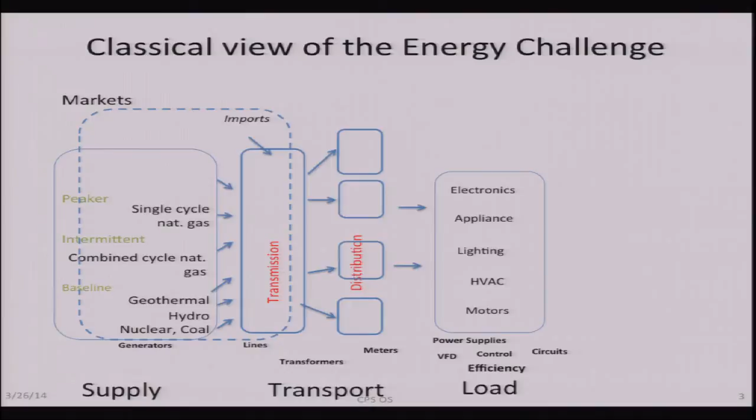So one way of teeing this up: as we think about the energy challenge, we've generally formulated it as 3 tiers: energy supply, transport—which is transmission and distribution to the load—and the problem of managing a portfolio of supply assets to meet a time-varying load. Sometimes as we get into information, we start talking about markets as the extent of it. If we look at what's happened, that piece is really the physical plane of a cyber-physical system.

The physical plane has changed as we've brought in fluctuating renewables like wind and solar, and increasingly storage—historically pumped hydro, but increasingly others. But that's not just on the supply side; we have fluctuating renewables and storage showing up on the load side too.

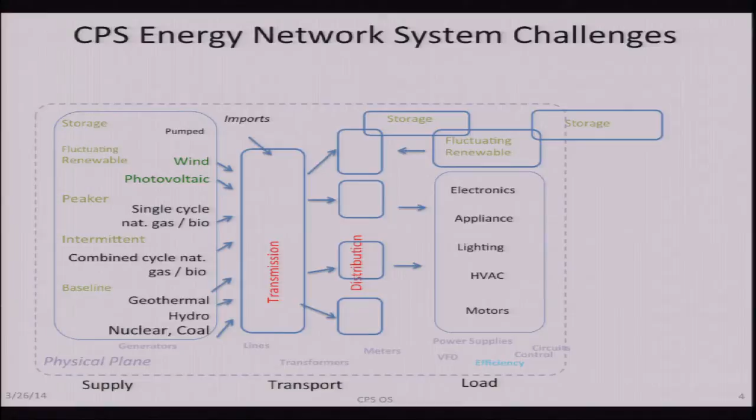And what's really broken about this is that the end purpose isn't to turn the motor on in the HVAC system—it's what you're delivering to people on the far end. So in some sense, that 4th tier of consumption, usage, and pricing is always left out of the diagram.

Today, within the grid, the feedback is subtle changes in the actual signal—voltage, frequency, and phase of electricity. Inside HVAC systems, the feedback is pushback on the temperature of air and water in the media that's exchanged. Whereas going forward, all the feedback is going to come through that information plane that is yet to be created.

So the challenge for all of us is creating the information plane for the future grid. That's the question I'm looking at primarily from the consumption side. As soon as you look at that, the answer is to pay a lot of attention to buildings—why? Because that's where you're spending 70% of your electricity. So let's start with the role there.

In that context, part of what helps us in many fields is to identify model problems—examples of the larger problem. For us there have been a few of these.

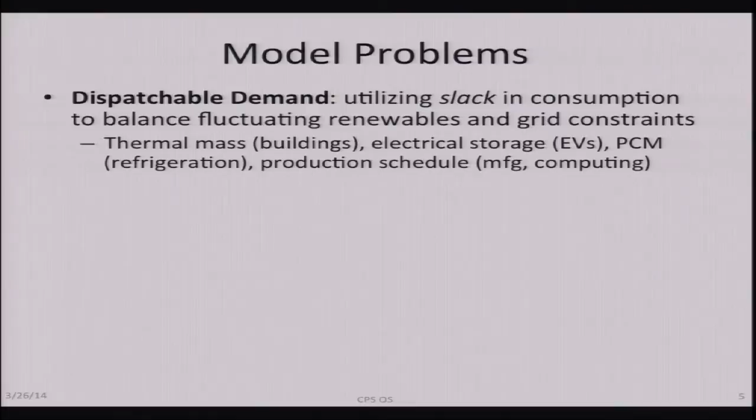The first one is this notion of dispatchable demand: how can we utilize the slack in the energy consumption chain—the demand—to balance fluctuating renewables? We touch on this with demand response and similar concepts. It means taking advantage of thermal mass in buildings, electrical storage like electric vehicles, and phase change materials in refrigeration.

The real gain comes when you can get a hold of not doing something you would have done and shifting that in time. That's where you get this infinite gain on the amount of effort compared to the effect.

So there are lots of different tools we could use to get the actual consumption side to exhibit a load that was more available. Of course, optimizing buildings in this case. We do that for energy efficiency, but just as well, perhaps more importantly, for comfort or for agility when you look at the first one. And that gets into integrated control, model predictive control, personalized conditioning, things like that.

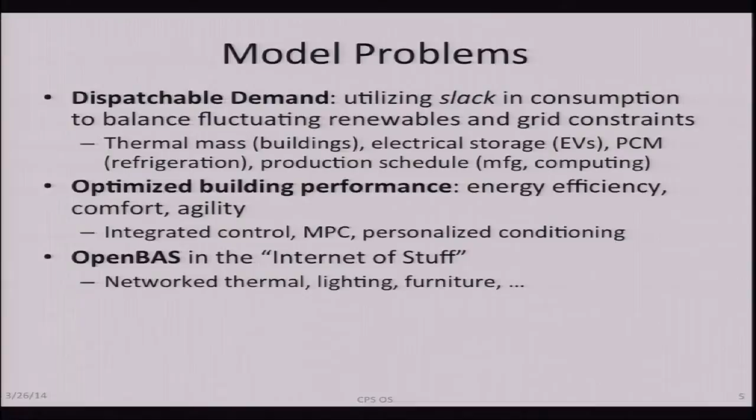2014 is the year of the Internet of Things. In 1999 here at Berkeley, we said 15 years from now we will have the technology to connect all of the people on the planet, and we will be in the act of connecting all the things. Here we are 15 years later, and that's precisely where we are. 30% of the world's population on the Internet, 92% of the world's population on a cell phone, and the next 10 billion devices without any question.

So part of that is moving towards what does that mean beyond the hype? And what you see out of the Consumer Electronics shows is really about open systems for building automation and other things like that.

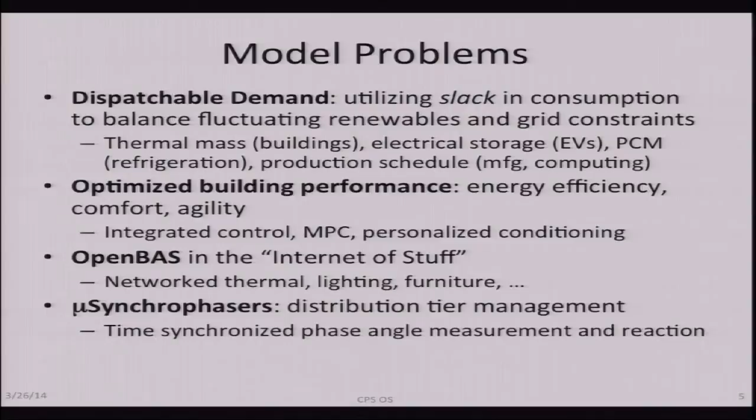Another one that's come directly out of i4Energy is going back in and starting to put information in the grid itself, in particular microsynchrophasers. This is: if you had time-synchronized phase angle measurements, can you actually get situational awareness across the grid and begin to react? And microsynchrophasers are pushing those from transmission to the distribution tier.

So I'm going to use these as a bit of background and walk through what it's taken to begin to solve the nuts and bolts question of creating an operating system for these kinds of things. Without question, the biggest first step was to get to the equivalent of what we did with the Internet and the web. What the Internet did was allow us to deal with all sorts of different kinds of technologies, serving a variety of applications through a narrow waist.

The web did that same kind of focus for the world's documents. And the question here has been: there's a tremendous variety of physical information—electrical, water, environment. Can we create a narrow waist so that you can deliver that information in a homogeneous way to a wide variety of applications? That was some work Steve Dawson-Haggerty talked about here 2 years ago, essentially creating a RESTful stack to deliver that in modern web services.

I'd say this piece with the simple monitor actuation profile has largely been done. There are other variants now, other work as well in this space, but without question, this is a part that's essential to get it going.

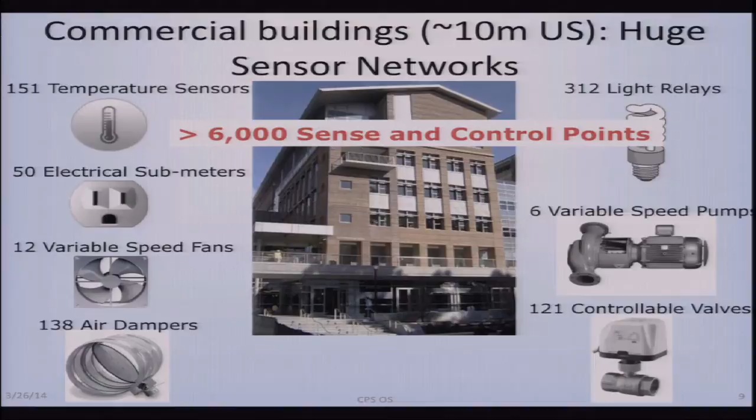Okay so far? Just to ground that, for example, in this building, how much did we sweep up? There's about 6,000 sensing control points that were just built in as part of the building. We didn't have to deploy any new ones. We added a few hundred others.

Is this a unique situation? Not particularly. Most large buildings—there's about 10 million commercial buildings in this country—and the biggest of them almost all have digital controls. Even something as old as the Bancroft Library looks not particularly different.

So there's lots of interesting sensors already throughout buildings. Wireless sensor networks and all the rest of the internet of all of that stuff is easy to deploy. There's all sorts of other sensors that you drop in throughout the space. There's far more, and of course we're all running around with a bunch of additional sensors and actuators in that space. And then there's the really important sensors, right? That what you hear, what you feel, what you see, what you smell are hugely important ones.

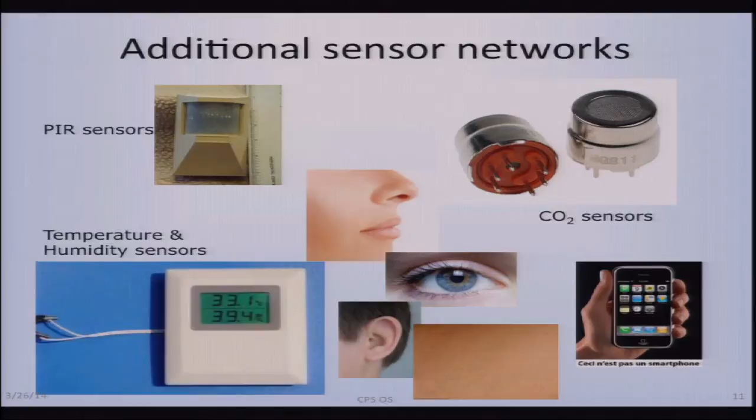That's kind of the bottom piece of this thing that we worked on for quite some time, and I'll give you a little bit of stats on that. The question then is sort of what do you do with that? So what I'd like to do is spend a little time trying to flesh out what would be in this service tier. There's very little question about how you elevate this up to where you could start to build services on top of it. What goes in there?

So, for example, here we are in the peak of summer. The blue shows what we would have expected to have spent on energy to maintain the environment. The red shows what we did. We did a little extra effort early in order to save a lot at the peak.

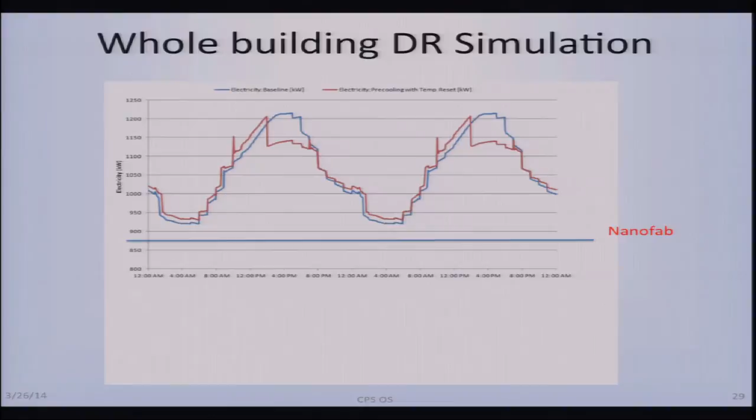A different example: the year of wireless sensor networks. We deployed zillions of CO2 sensors. That's a don't-care anymore—wireless sensor networks are cheap by the dozen. You can bring in calendar data; it's not hard to do that. What's hard is actually integrating it into the building system and making use of that information.

So here's a little exercise. These days, Title 24 says buildings should operate on demand-controlled ventilation. Rather than blowing enough air to provide clean, fresh air regardless of occupancy, you should have a CO2 sensor and bring in more ventilation if you need it, less if you don't. So what's the aftermarket for buildings? Okay, easy to deploy the sensors—what do you do with it?

In this particular example, which Jay Taneja presented: for starters, all decent resources like a room have an entry in the calendar, so you should sweep that up. We can measure the CO2 and blow air proportional to the amount of CO2. So, for example, before the meeting, freshen the room up, bring in nice clean air, and during the meeting, modulate it so you bring in more when you need it. And of course not everything's scheduled, so react to that.

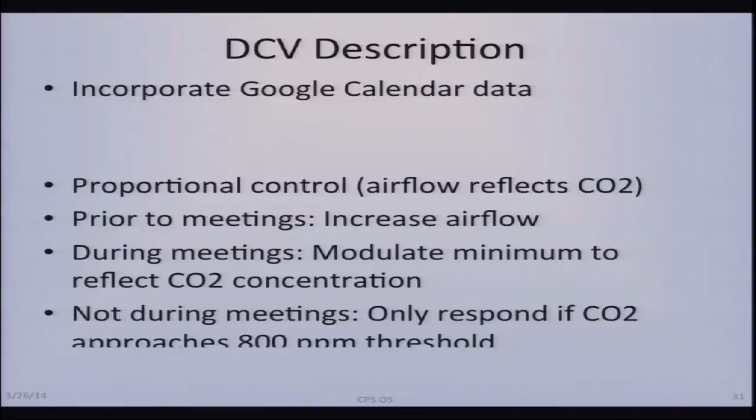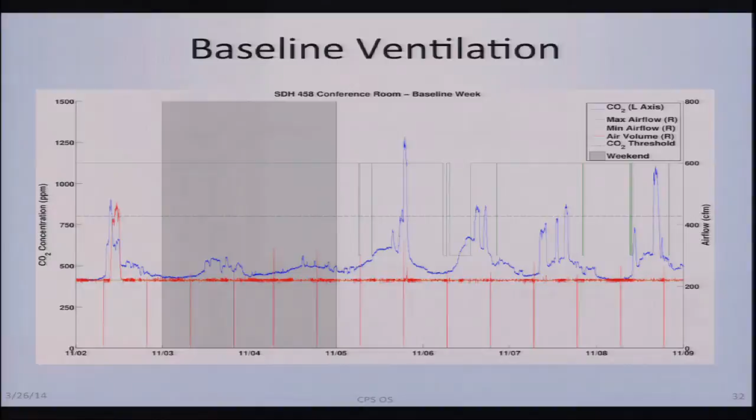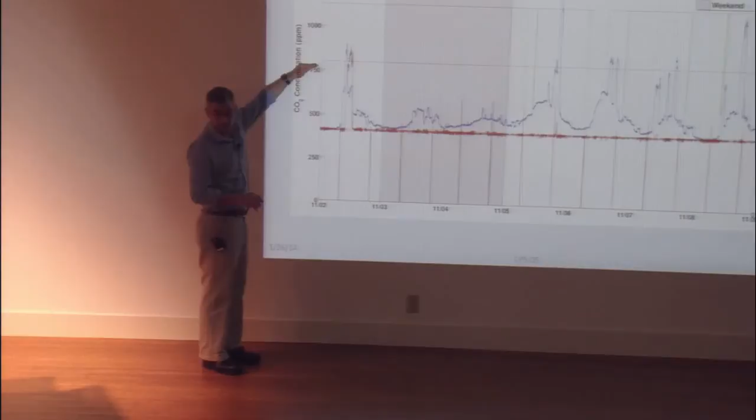All right, how does that perform? Here's a typical seminar room in this building, blowing 220 cubic feet per minute continuously, even when nobody's there. Here's the CO2—notice it's still taking excursions outside of the 800 parts per million. In fact, I think most rooms, especially classrooms on campus, especially in the afternoon, way exceed this—if you're wondering why you fall asleep in lecture. Sometimes exceeded by a lot, okay?

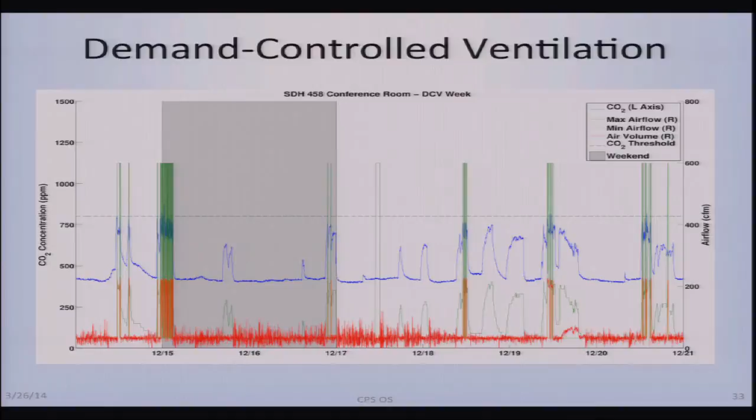As opposed to that, same hardware, just a little more intelligence: now you're typically blowing 30 cubic feet a minute. You blow a lot more when you need it, you blow it in advance, and you almost never go out of range. Result here: saving 85% of fan power for a considerably better environment. So you don't actually have to make this false trade between energy efficiency and performance.

Let's flesh out a little bit more of what's above there. One of the notions, as you start to get into this, is that all of a sudden the idea of applications for the building is a reasonable thing—in fact, many competing applications is a reasonable thing. Those applications use common resources and need to take action across multiple resources.

So in the computer systems world, databases have a notion of a transaction—something where I want to make multiple changes to the state of things, and I want the behavior to be all or nothing. So a piece of work is to try to understand what would be a transaction manager for buildings. I won't go into a lot of detail other than to suggest there is one, and that in buildings it's rather different than in a computer system.

For example, a database transaction: you go to your ATM machine, start to withdraw something, something crashes—you don't get your money. You want to make sure either you get your money and the debit to your account, you get both of those, or neither of those, not just one, right? The bank has a preference on which one; you have a different preference. They're both bad, okay? So the notion here is you'd like some of that.

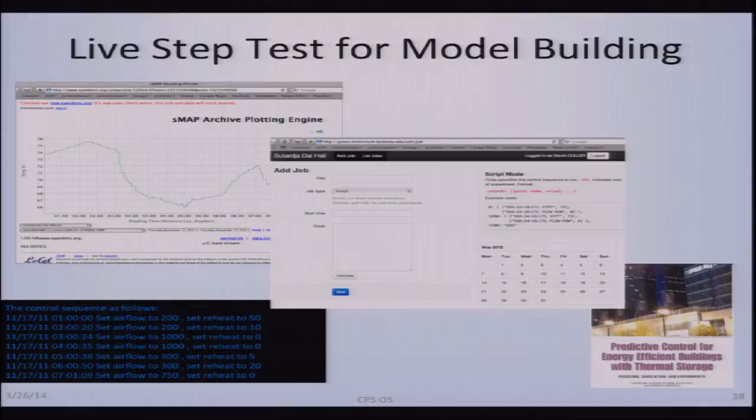So in particular, Francesco Borrelli's team wanted to do step tests throughout this building: here, go move the temperature like this. So we built a tool where they could script the building, and we set rules for when they got to script the building, which was a nice example to develop under what conditions can you do what. So this is part of the things you do as an application, within an envelope that controls it.

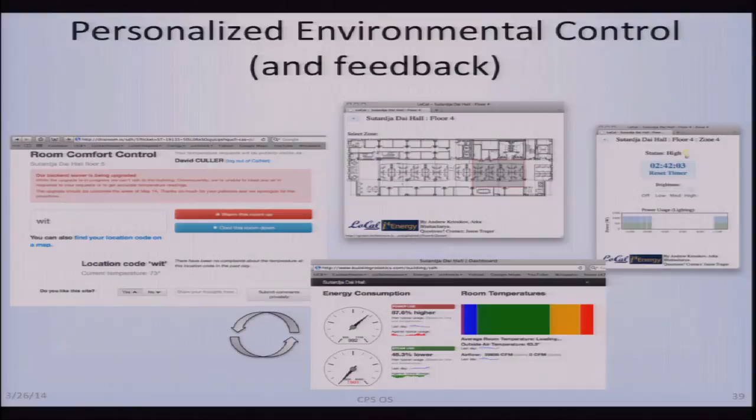If we could do that, we could do almost anything else. So that was essentially the underpinning for doing things like personalized control that allow individuals to say, I'm in this room and I want a puff of cold air right now. Why? Because I want a puff of cold air right now, right? This isn't, I want to send email to the building manager, as good as Domenico is, to say please would you change the set point. I'm not trying to change that. I want the building to respond to me, just like any other kind of human interface.

So those kind of things caused us to begin to understand how to develop an authorization service. And this is an interesting design trade-off: can I get pre-authorization, or do I have to check everything? Where we evolved to was a structure where the application would go and request authorization for a certain set of resources under a certain bound, and the system would make sure they stayed within that. And if they tried to go beyond - Francesco's team tried to heat the auditorium up to 90 degrees - we would abort, fall back. Any guesses on what the approval mechanism was for that authorization?

Well, we did the simple thing. It showed up on Domenico's screen, and he could push the button that says that's okay. We could automate Domenico a little further, but that was another piece to build into here.

So this is showing the BLAST app I talked about. It would identify certain resources and a temperature range that it was going to flex the building between, 65 and 75. It gets back an authorization token, something encrypted. It can then use that, and as long as it stays within it, it has authorization. What I've thrown in here is an example where I've aborted it, and you can see the system automatically reverting back into the non-blast mode. Early versions of this, you get halfway through, you open everything up, you blow cold air, and then you walk away, and you're blowing cold air all night long, right?

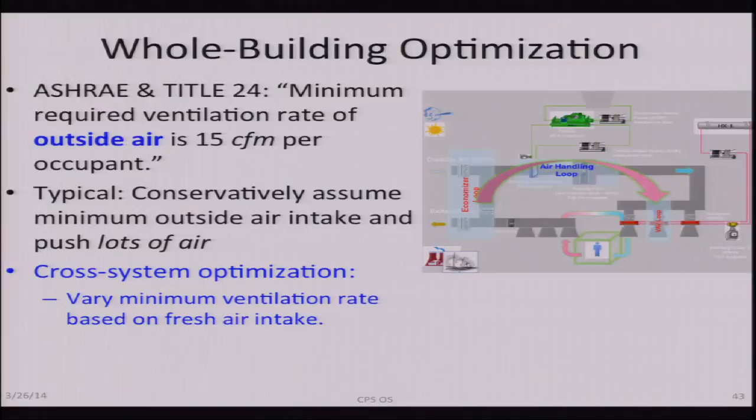The two key ideas were: raise the level of abstraction so applications work at a semantic level - I want to talk about rooms on the top floor, not this particular lighting relay. The second was to build up this hierarchy of drivers so operations are at a high level - I want to turn the lights on 100%, not manipulate points I don't know about. Those ideas fleshed out a hierarchy of drivers and an entity relationship graph that moved us up.

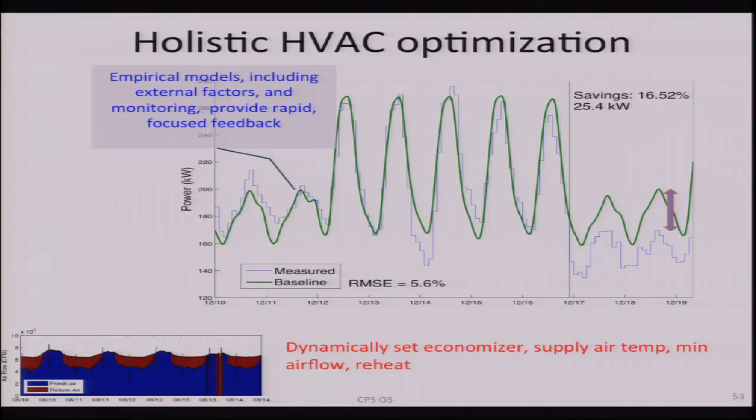This is an example showing a couple of things. One is you'll never move things forward if it takes a year to get enough statistics to see if the change you made was helpful. So a grad student gets to do an experiment on the weekend - a weekend that's never been seen before. You've got to learn from the past so you get a good estimate, and then have confidence the gain you made was actually positive.

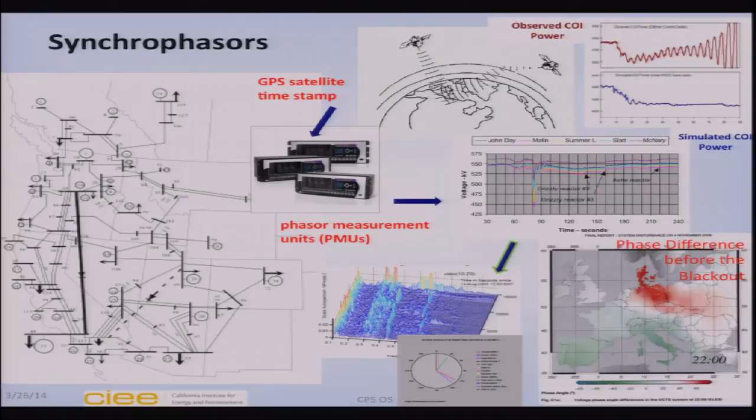I did buildings. This same technology we've been using for synchrophasors, which is getting wide area phase angle measurement and looking at the difference, partly because phase angles tend to diverge just before very bad things happen. This was a different example of pushing the underlying infrastructure to get very tight time synchronization.

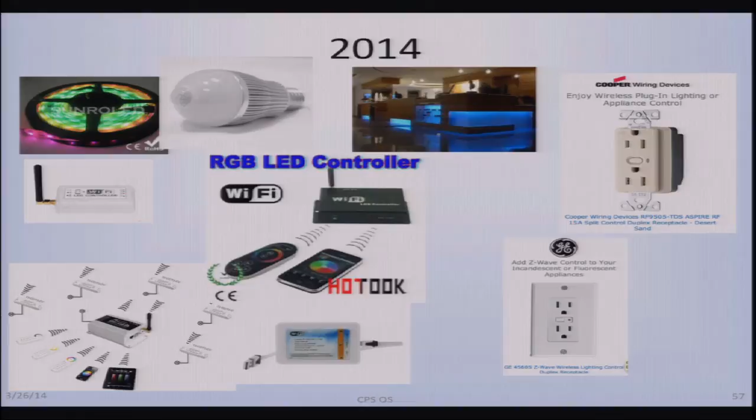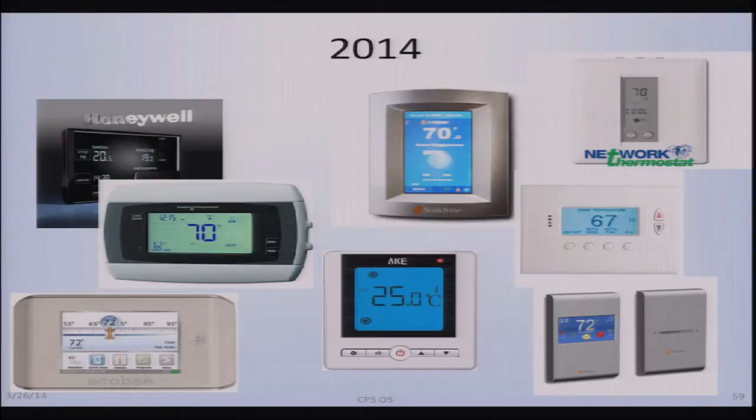For example, in October 2012, the internet light bulb came out. Today, LEDs are everywhere, and all of them have a network backend. In 2013, the big rage was Nest, which had a big 2014 exit, but the bottom's already fallen out of the network thermostat market - everybody has network thermostats everywhere. And of course it's all about the wearables and ambient displays and all the rest of it.

There's no question - so a different connection here. You're all used to a thermostat, right? Imagine if what you're really trying to do is control the comfort in a building. Imagine if you had a comfort dial - what would you set it to? Obviously you'd set it to 11, right, or something - but what would that even mean? Today you have a space like this, and you have a few of these, and you're trying to derive comfort from it.

So we've been playing with this and all those other things to begin moving beyond the building to make sense of the Internet of Stuff - everything is networked, even the furniture. And if you think about that, now you have a gauge on comfort: if nobody is overriding their environment with their chair, the environment's comfortable. If you're overriding it because of diversity in what people want, or because the building is trying to flex - this is an interesting world. This has caused us to dig in and think harder about some of these pieces.